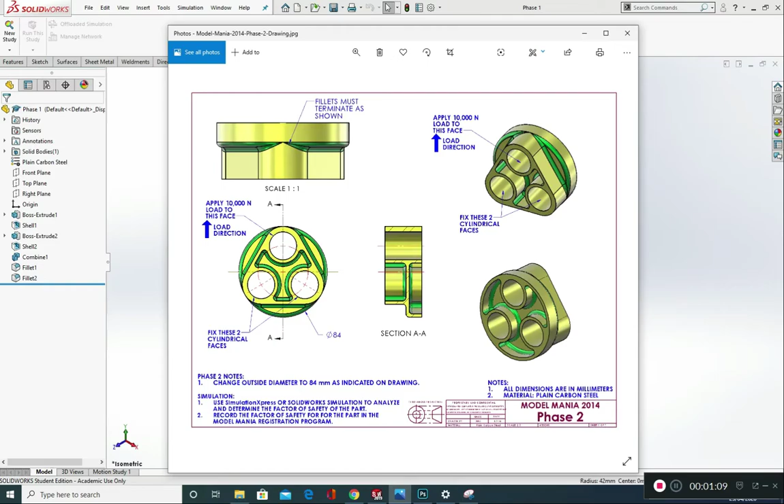Okay, so I've got Phase 1 open. This is the Phase 1 drawing which we completed not too long ago, and I'm just going to bring up the drawing, and we can see that there's a few changes that we need to make. The first change here is the outer diameter is changing to 84. It was in Phase 1 100 millimeters, it's changing to 84. Now that change is going to have a significant impact on these fillets that we've produced in Phase 1.

The second thing that we need to do is use SolidWorks SimulationXpress or SolidWorks Simulation to analyze and determine the factor of safety for the part. We've already applied in Phase 1 the plain carbon steel, and we're still working in millimeters. So let's go into SolidWorks and change this, and let's see what impact this actually has on the fillets that we produced in Phase 1.

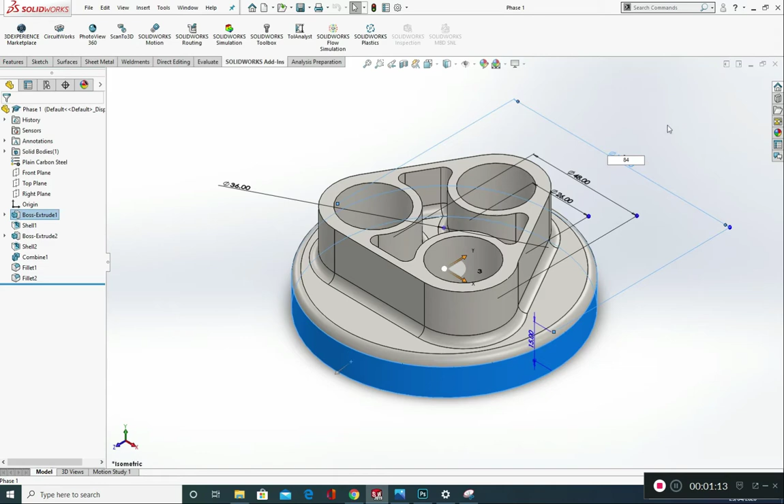So let's minimize this, and let's go ahead and just click on this face here, and you can see that this is the 100 millimeter diameter. Now shrinking that to 84, you can see that that is going to encroach on these fillets. So let's put it in the 84, and you can see straight away we're getting errors over here. There's a warning for a particular edge.

So what I would recommend doing in this kind of situation would be go and investigate what's actually happening within that fillet feature. So just left click and go and edit the feature and see what's happening in this items to fillet. So one edge it's still got, which is this one, and one edge it's missing. As I've clicked on this edge, you can see it's highlighted there in red. That is the original 100 millimeter diameter circle.

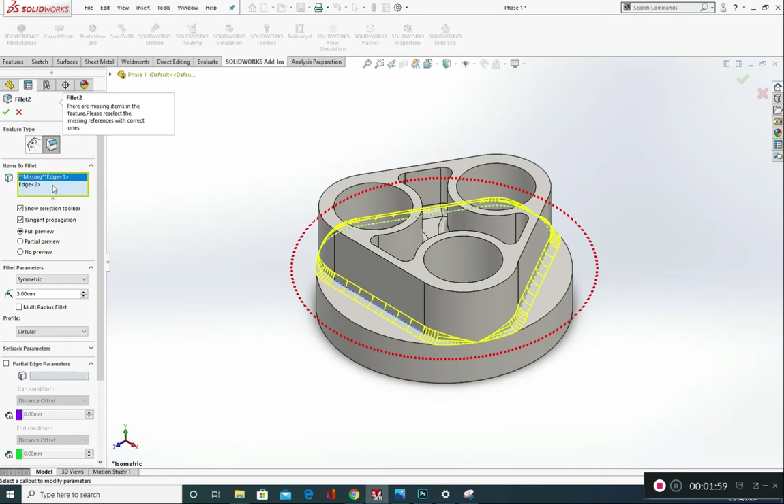Sometimes the best thing to do in SolidWorks is just to start afresh when it comes to this. Sometimes it can get quite tricky, especially with fillets. So in this scenario, I would advise to right click and just clear the selection altogether. I would then scroll down and just take note of this option here, fillet options. Sometimes this is minimized, it usually is on starting up SolidWorks, so just be mindful that this option is here. We're going to come back to this in a bit.

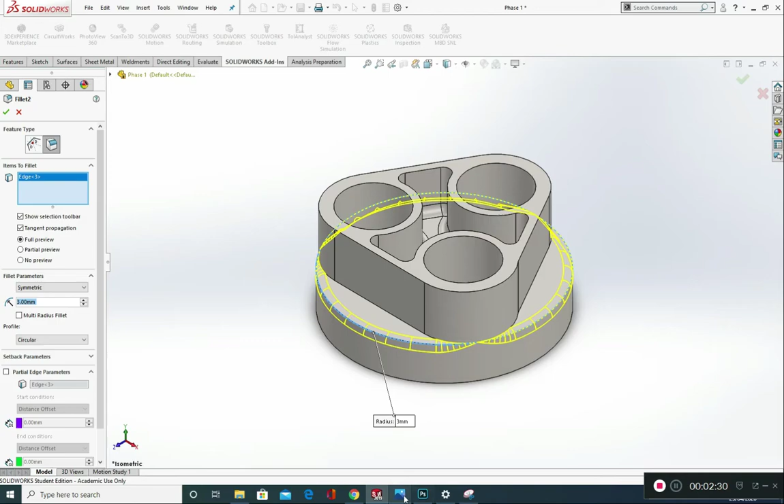So we're going to scroll up, and we're going to pick some items to fillet. The first item that we're going to fillet is this edge. Okay, just notice that on here this is not terminating as it is showing on the drawing. You can see that this is horizontal all the way across, and this is horizontal, and then tapers off to meet in the middle with this side. On mine, what's happening is this is tapering off, and this is tapering off as well. So that is incorrect. How to resolve that?

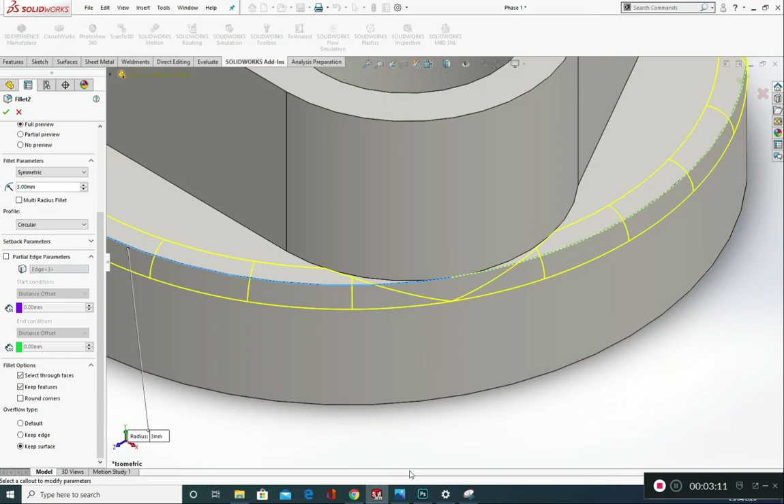We need to scroll down, go to the fillet options, and use that keep surface option. By selecting that, you can now see that this is remaining horizontal all the way around and wrapping around the part, and this part here is tapering off as we would want to, and as is shown in the engineering drawing.

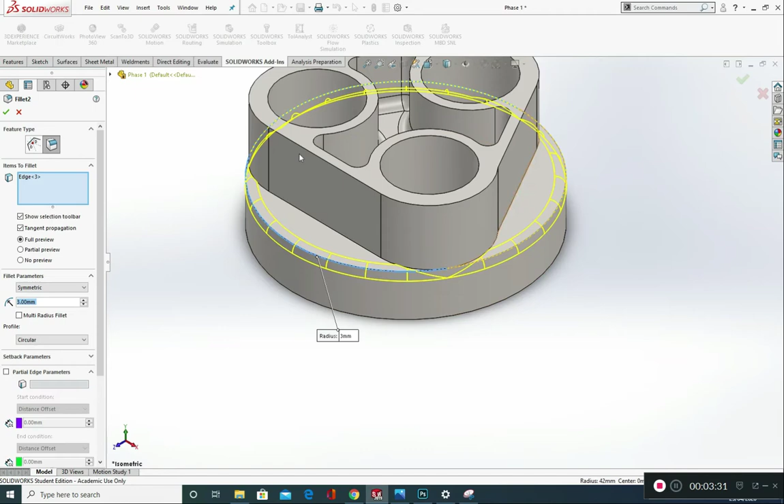Now, SolidWorks sometimes won't let you select another edge to fillet. Sometimes it runs into problems. So if I select this edge, for example, it's not liking that at all. So I'm just going to remove that and delete it. I'm going to keep this, and I'm just going to green tick it and keep that as a fillet. I'm then going to go back into fillets, keep my 3 millimeter fillet in place, and I'm just going to fillet these edges.

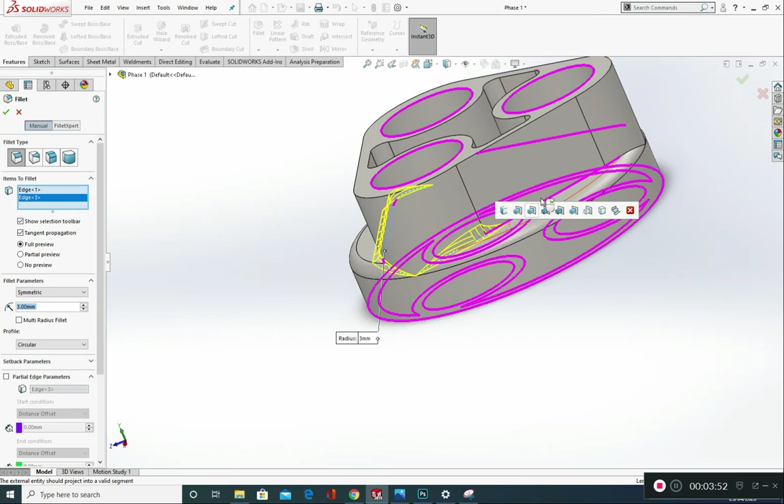Okay. Not liking that one, so we'll just delete that one and just pick up this edge, and then pick up this edge, and then just move around the part, like so, and we've got them all perfect, so we can green tick.

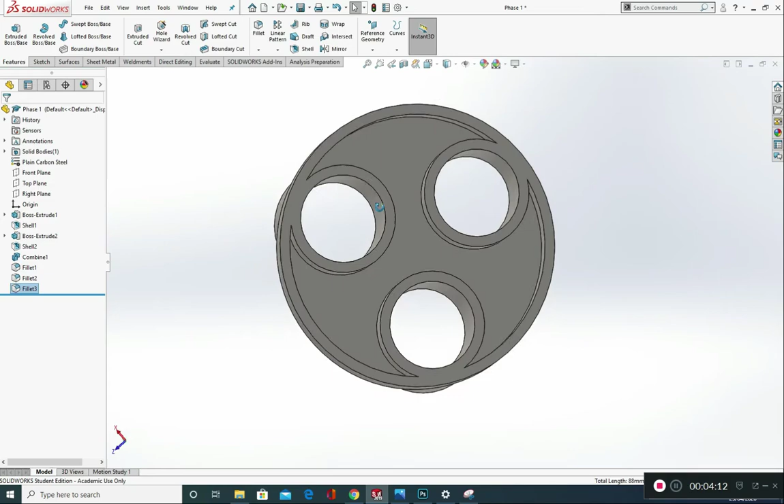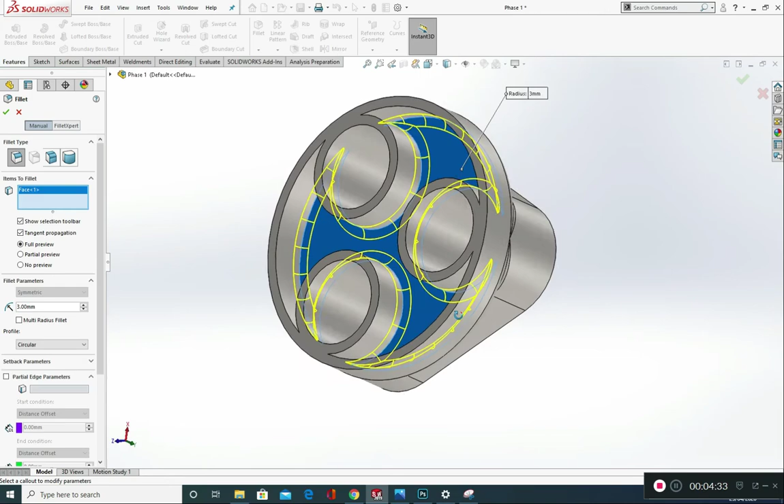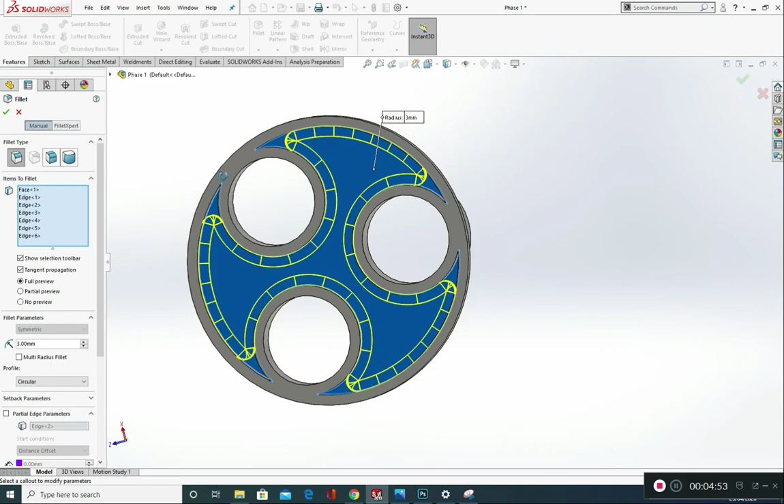We're going to go to fillet. These are 3mm. Just click on this face. Okay, put those fillets in, and then you just need to click on one of these edges like so, and it didn't come up that time. Sometimes you can, let's try this one. There we go. Connect to the end loop, 4 edges. Just select that and it will pick up all the remainder of the fillets that it's anticipating that you want to fillet. Once you're happy with that, you can green tick. Control 7 on the keyboard for the isometric view.

And what I like to do as well is just put an appearance on those fillets. So I've gone into appearance, I've gone to solid. I'm just going to drag this red solid onto this fillet. So I want this to be applied to fillet 3. Same again, just drag that onto these fillets. And these fillets underneath.

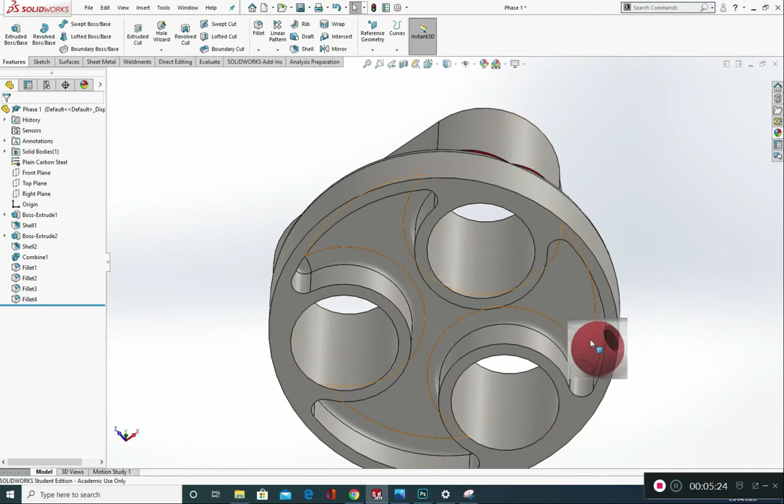And this fillet on the edge as well. I just like to put those appearances in just so if the fillet ever does change, you can see that happening straight away, and they're really easy to identify as well. Okay, so that is the changes made and the changes updated.

From here, we need to look at the SolidWorks Simulation or the SolidWorks SimulationXpress. So in previous video tutorials, I've talked to you about going into the SolidWorks add-ins, turning on SolidWorks Simulation. A simulation tab will then appear. Click on that simulation tab and then we would talk about going through a new study, making it a static study, all that kind of stuff.

I'm going to show you in this tutorial how to use a different way of doing it, which is shown here. So you can use Simulation Express or SolidWorks Simulation. Simulation Express is a wizard, so it takes you step by step through each part of the simulation, just so you don't miss anything out. SolidWorks Simulation is a bit more manual. You would go into new study, you'd pick a new study, for example, and you'd have to go in each one of these and know your way around this particular ribbon.

So I'm going to show you, just going to delete this particular simulation. And if you go into Tools and Express Products, go to Simulation Express. Okay, it's a good thing that that came up actually. So let me just show you this message. It says SolidWorks SimulationXpress cannot be used because SolidWorks Simulation is checked in the add-ins. That means that in this tab, this is grayed out, so it can't run both. So uncheck this.

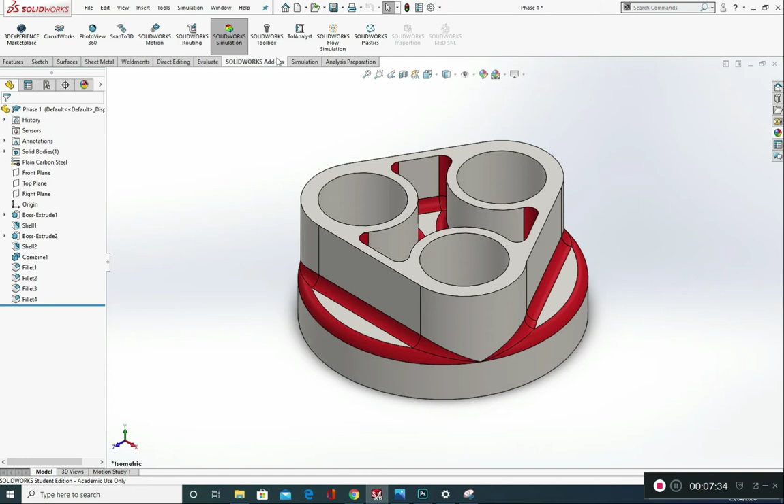And then go back into Simulation Express. They're trying to compete against each other at the moment, so just uncheck the SolidWorks Simulation in the add-ins, and then you can select this. This will run fine now, no problem. And this is the wizard now on the right-hand side. So from here, we're going to press Next.

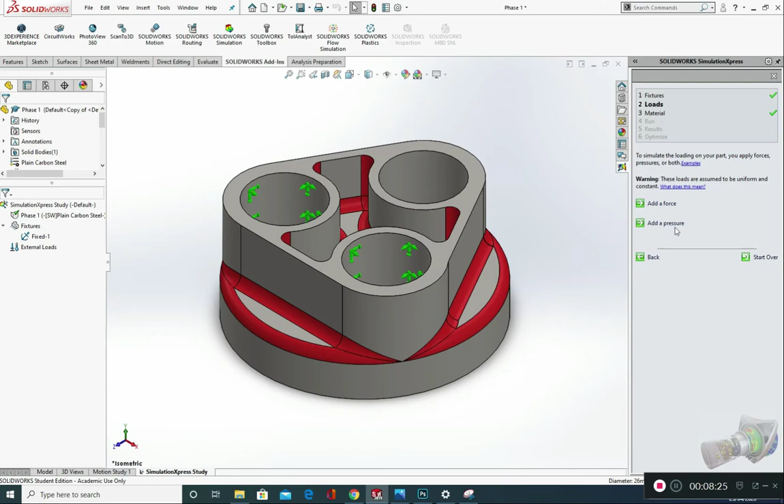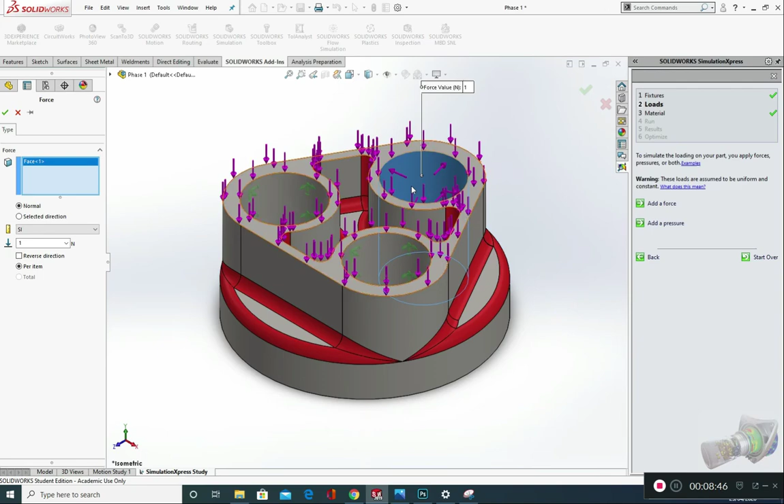So that force that we're going to add is going to be to this cylinder. It's 10,000 newtons, and it's going in this direction. So 10,000 newtons here, going in this direction where my arrow is moving now. So I'm going to click on this face. You notice that all the arrows are going in different directions. That's incorrect. Ours needs to be going in one direction. So we're going to go to selected direction.

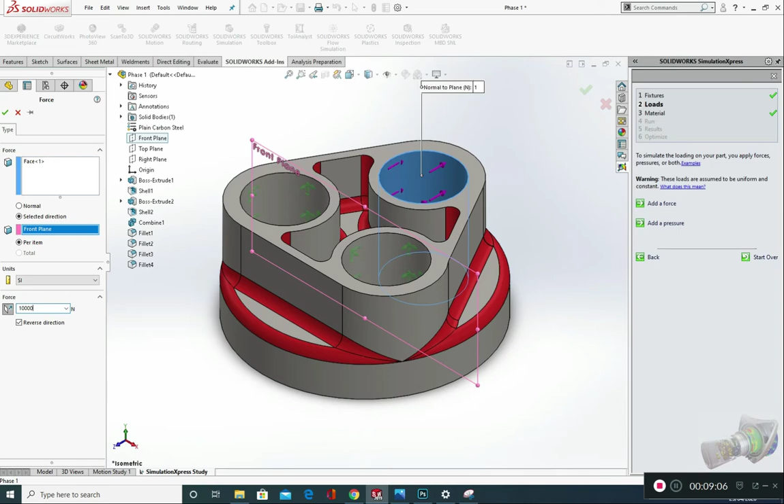Click on this drop down here, and we need to choose, in this case, the front plane. The arrows are running in the wrong direction. We need to reverse the direction here, and we need to put in our 10,000 newtons. Okay, and again, green tick. Then we can go to next. We've already applied a material.

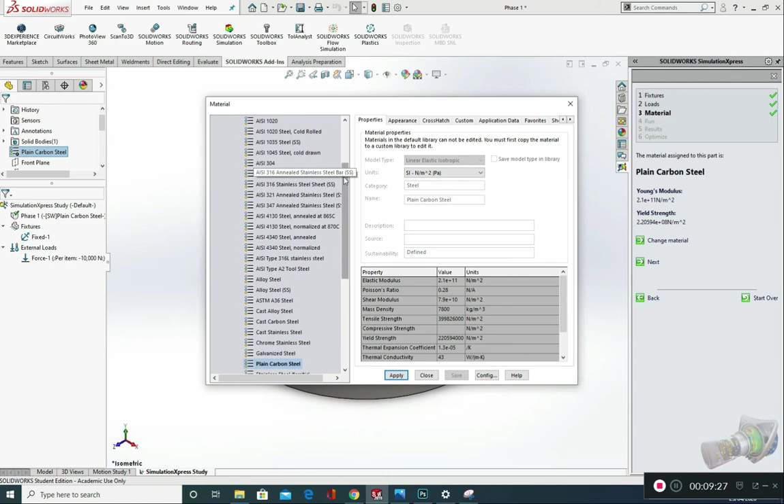If you hadn't, you would need to go into your materials over here, right click and choose plain carbon steel. Or if it's not plain carbon steel or none of these in this list, you could always go to edit material and pick your material from the long list of materials that you've got here. We've got ours in place already from phase 1, so we can go next.

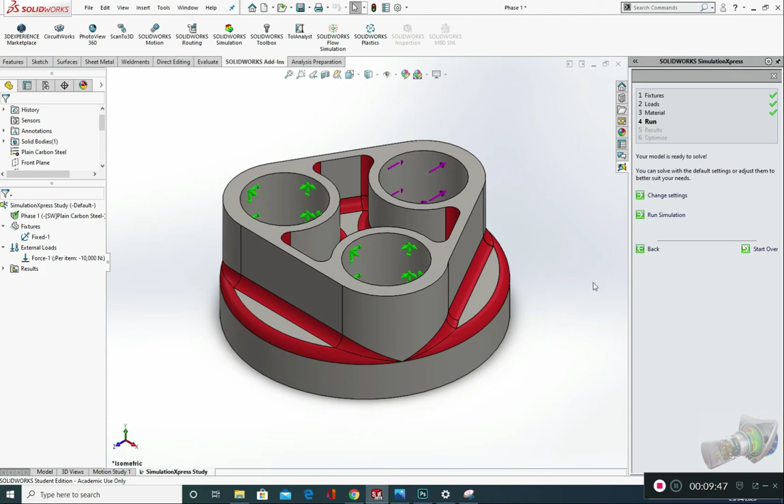We're going to run this simulation, give SolidWorks a couple of seconds to just do that, and we should get a little bit of an animation showing us what would happen if that simulation was put in place. So there you go, there's your animation. We're happy with that. We were expecting this. These were two anchored points, fixed points, and this was 10,000 newtons, and this would be the outcome. So we can say yes, we're happy with it, it's what we expected, continue.

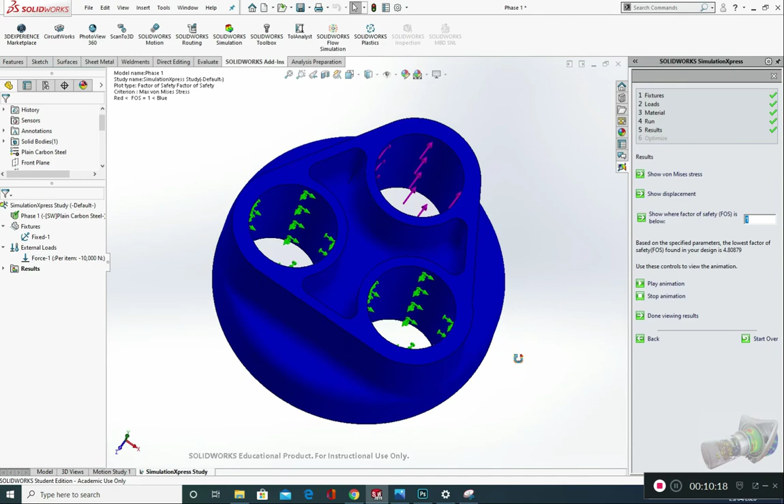And then from here we get our factor of safety. So there's our factor of safety there. However, we can use this here, so show where the factor of safety is below 1 at the moment. Okay, that is all blue at the moment. So if I do factor of safety below 8, let's just up that to 8, and the enter key, you can see areas are now getting highlighted in red.

So that concludes this phase of SolidWorks Model Mania from the year 2014, and this has been phase 2.